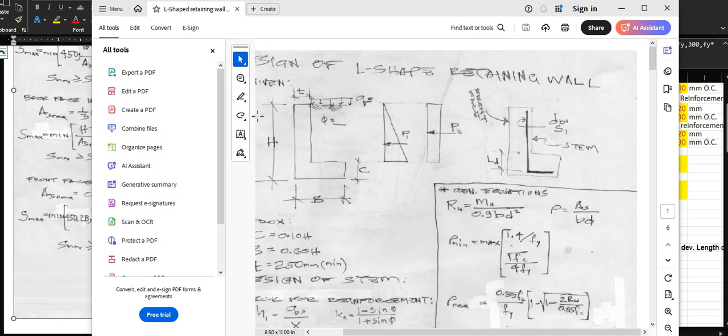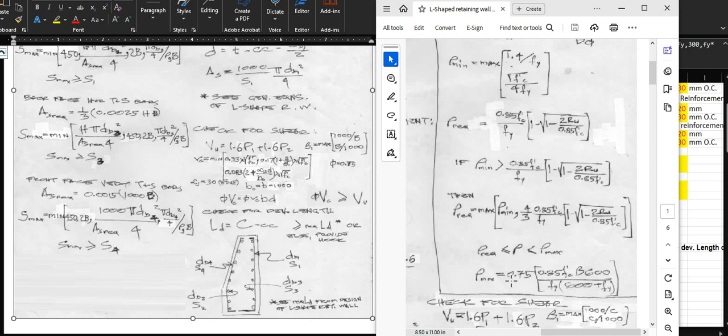Okay, let's go through the design of the L-shape retaining wall. So here are the general equations: R sub U, rho min, rho required. If rho min is greater than rho required, then recompute your rho required, which is the maximum of rho min and 4/3 of rho required. Then we compare this to the actual steel ratio. Rho should be greater than the rho required, and rho max should be greater than rho.

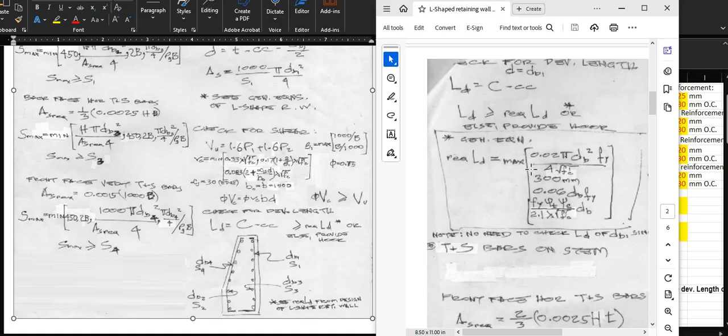Okay, so let's go now to the pattern of the L-shape, which is, the required LD is the maximum of so forth and so on. Let's check this. So the required LD, here: we have 0.02 times pi dB squared Fy divided by 4, times square root of f prime c, and then 0.06 dby1 fy, then 300, then fy times dby1 divided by 2.1 times so forth and so on, f prime c.

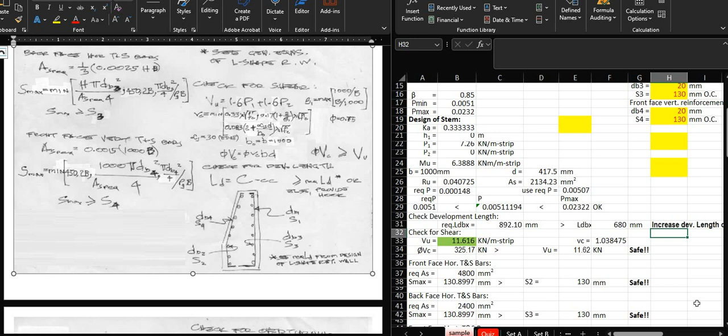Next is check for shear. So in checking for shear, we need the lateral forces. Lateral forces are what push against the retaining wall, which includes P1, P2, and if you have surcharge, that's included too. If you have pore water pressure or saturated sand, you include that as well. Then you multiply it by 1.6 — this is like its ultimate value. So times 1.6 times P1 plus 1.6 times P2.

And then we compute the allowable shear stress, small vc. This is taken from these equations: 0.33 times square root of f prime c, then 0.17, so forth and so on, then 0.083, so forth and so on. And the capacity reduction factor phi is 0.75. Then this is a constant of 30 — we considered this as edge. And the perimeter or shear perimeter is the meter strip, which is 1,000.

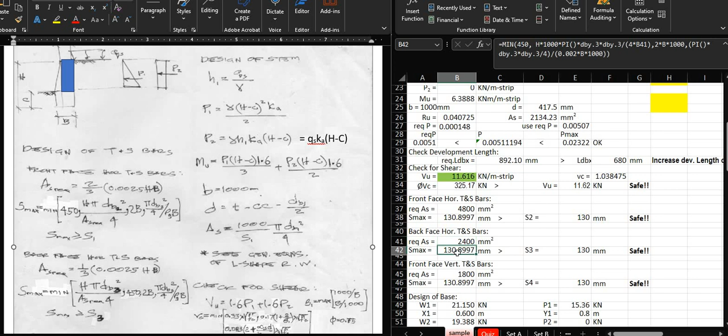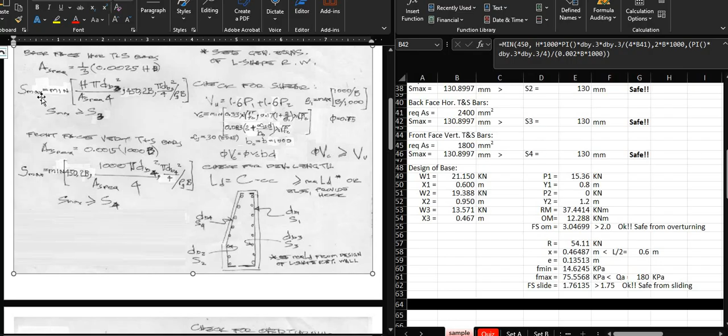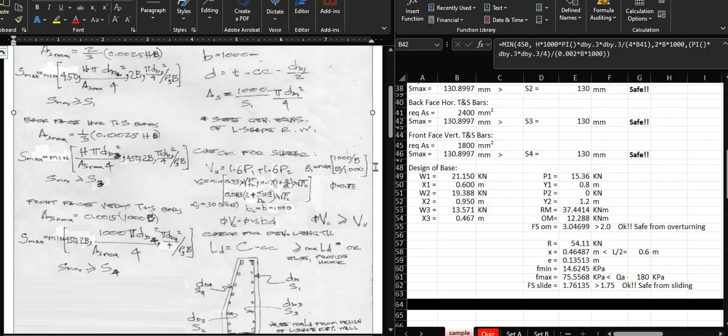And this involves now DBY3 at S3. Same procedure, kailangan mo pa rin yung S-max. But this time, ang AS required natin is 1/3 of 0.0025 HB, and then you get the maximum S. Pero ang i-consider mo dito ngayon ay DB3, and then you compare this with S3. So mapapansin nyo na dito sa front face 2/3, and then sa back face 1/3 siya.

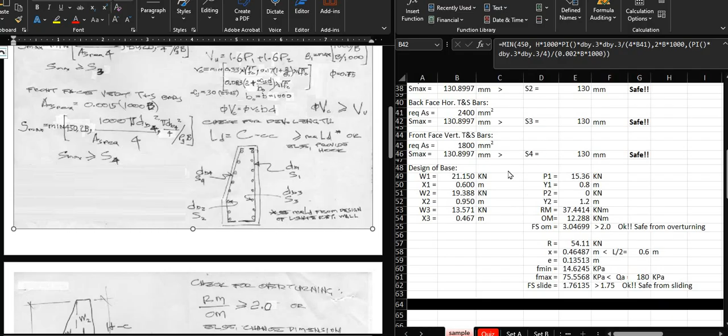Ibig sabihin, nagtutulungan silang dalawa para sa temperature and shrinkage. And last, for the temperature and shrinkage bars, this includes DBY4. Meron din tayong AS required, this time 0.0015 times 1000 B. Okay, and then you compare that with S-max again, and you compare that with S4.

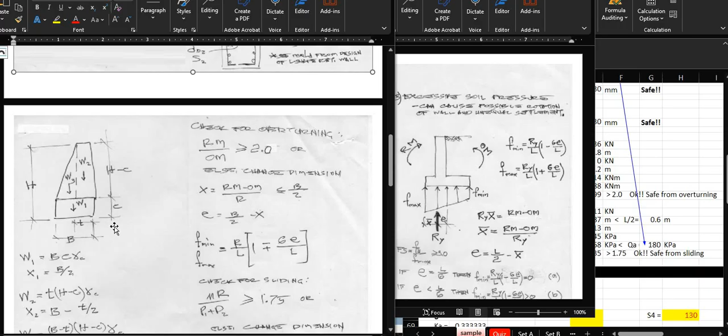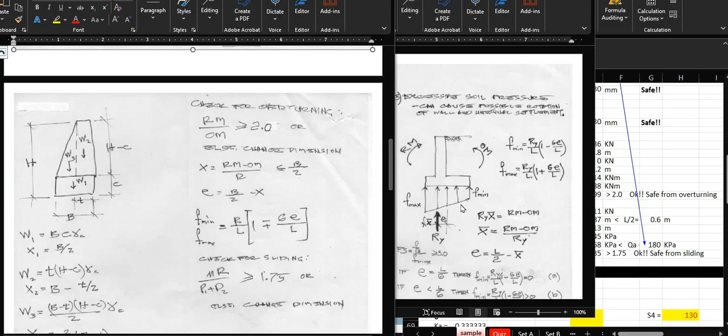Remember na meron tayong 4 possible modes of failure for retaining walls. Meron tayong overturning, which is our next topic here. Tapos meron tayong number 2, sliding - kasali rin yan dito, check for sliding. And then number 3 is soil pressure, yung F minimum and F max - i-compare mo lang yung F-min tsaka F-max sa Q allowable. And then number 4 is structural failure - etong number 4, yan yung ginawa natin dito sa check for shear tsaka yung check for reinforcement. Ngayon, punta na tayo sa overturning.

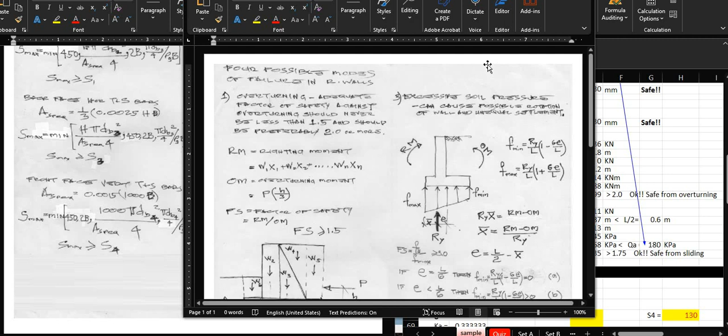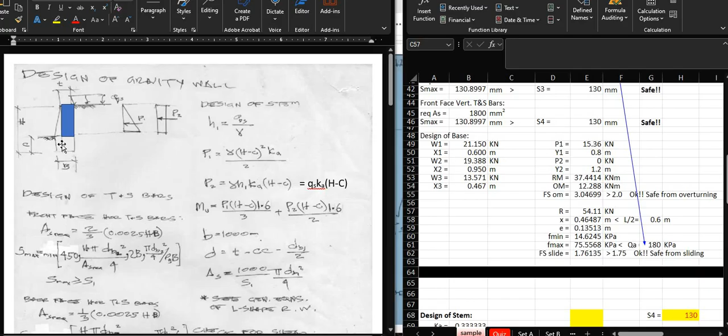So for gravity type wall, ang resisting moment lang ay due to the weight of the wall itself, which is divided into W1, W2, W3. So W1 is B times C times unit weight of concrete. Again, this is per meter strip, kasi ang unit weight is kilonewton per cubic meter, tapos BC, square meter lang yan, so meron tayong maiiwan na kilonewton per meter. Ngayon, yan yung meter strip. And then ang lever arm niya is X1, which is B all over 2.

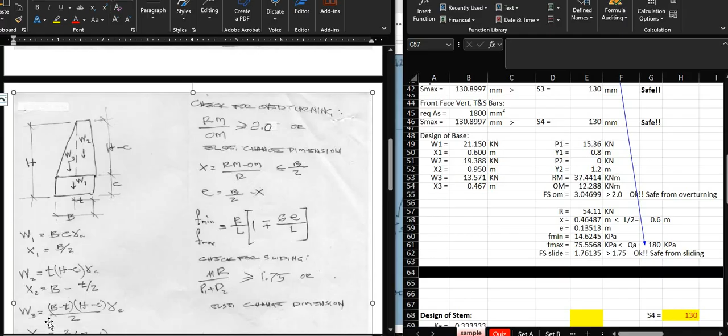Now let's go to W2. So that is T times H minus C times unit weight of concrete. And then ang lever arm niya from the toe is itong part na away from the soil - that is B minus T all over 2. And finally W3, itong triangle yung W3, and that is equal to the quantity B minus T times the height of the triangle na H minus C divided by 2 times unit weight of concrete. And then the lever arm from the toe is 2/3 of B minus T.

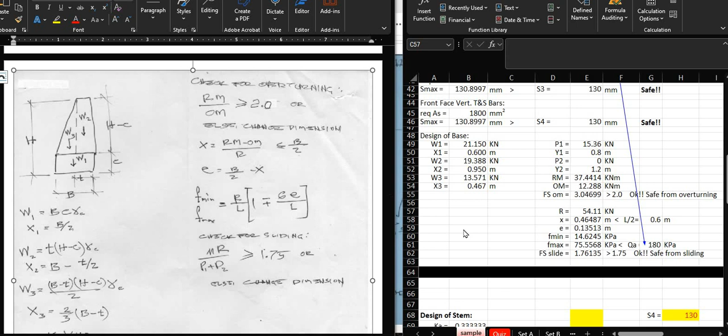Okay, so yan yung mga weights tsaka lever arms. And then para sa overturning forces naman, which is yung magtutumba ng wall, we only have P1 and P2. So ito, K sub A times unit weight of soil times H squared divided by 2. And then yung P2 naman, KA times surcharge times H.

Dito, kinonsider na natin yung full height nung triangle. Itinapat na natin siya sa full height nung retaining wall, capital H na yung ginamit natin. Ang lever arm ng triangle is H all over 3. Ang lever arm naman nung rectangle is H all over 2. So mapapansin nyo dito sa P2, minultiply natin kagad yung surcharge ng K sub A.

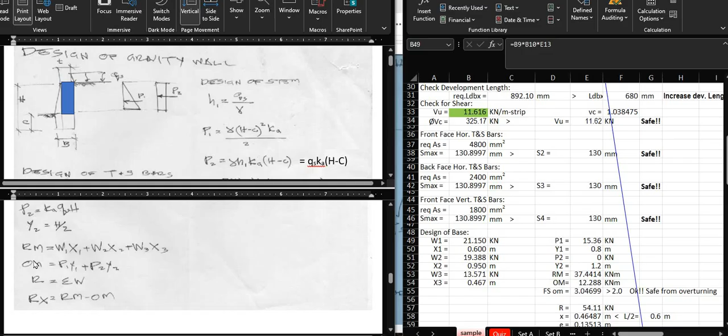Ang righting moment is W1x1 plus W2x2 plus W3x3, and then ang overturning moment is P1y1 plus P2y2. And then ang reaction, which is equal to summation weight - R is summation of the weights. And then, ang kinukuha natin dito ay yung lever arm nung reaction, so ang kukunin natin ngayon dito ay yung X.

So now let's check the factor of safety for overturning moment. For overturning, your Fs is equal to righting moment divided by overturning moment. This should be greater than 2. Otherwise, kapag less than 2, then magpalit ka na ng mga dimensions. Okay, so in our sample, our factor of safety is 3.04, kaya okay siya.

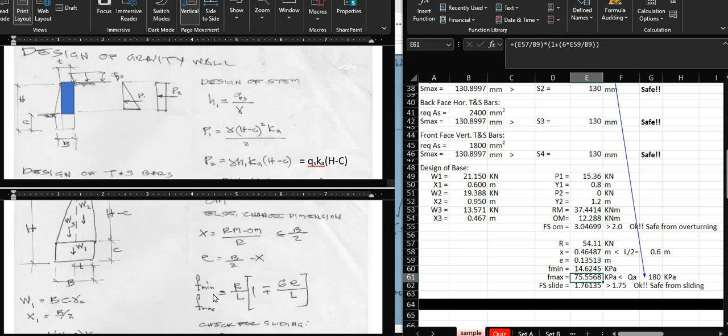Next is, kailangan natin yung para sa foundation or sa footing, sa bearing, kailangan natin dito yung X. X is equal to RM minus OM divided by R. And then yung eccentricity is equal to B all over 2 minus X. And then from here, masosolve na natin yung minimum soil pressure tsaka maximum soil pressure - ito yung mga footing pressures. Dapat yung dalawang footing pressures na yan should be less than Q allowable and should not be lesser than 0. Okay, and then next is check for sliding.

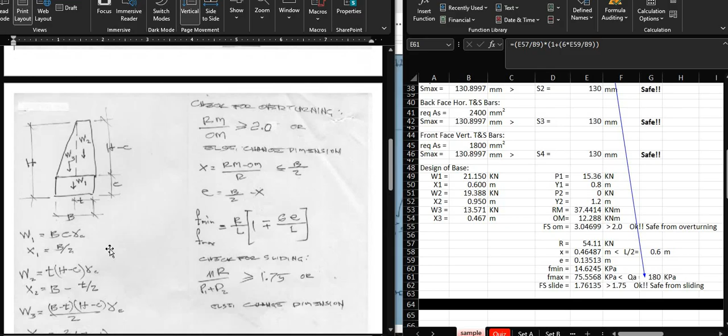Sa sliding naman, kailangan pa rin natin yung mga numbers na nakuha natin sa overturning kanina, which is yung reaction or yung total ng weights. So the factor of safety for sliding is mu R all over P1 plus P2. Take note na itong mu R, yan yung frictional force. Tapos yung R, yan yung normal force or the force perpendicular to the direction of friction. So R is simply the total weight of the gravity wall. Then mu, yan yung coefficient of friction.

Tapos yung pushing force is P1 plus P2. So that is the factor of safety. It should be greater than 1.75. Okay, so dito sa sliding, 1.76, so konting-konti na lang, magfe-fail na siya. Ngayon, kung mag-fail siya, mag-change ka ng dimension.